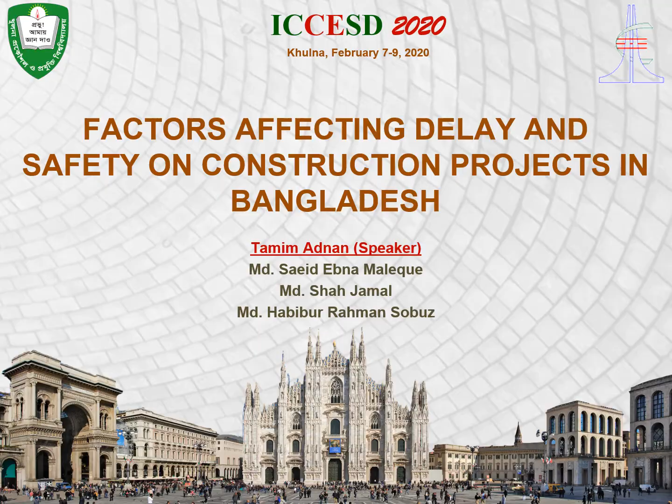The motivation of our work is that Bangladesh is tackling its large population by developing business and other activities to create employment, and to meet this demand we need lots of infrastructure and improvements. However, those improvements have been hampered because we overlook several factors. That's why projects become delayed, and we also sometimes ignore safety factors, which cause countless accidents and loss of lives in construction sites.

However, if we closely look, several countries, namely Saudi Arabia, United States, India, are now overcoming this by analyzing several factors before construction begins. They find out factors related to the project, take measures, and mitigate problems, so they can accomplish the project within schedule. That's why I think such measures should be implemented in Bangladesh as well.

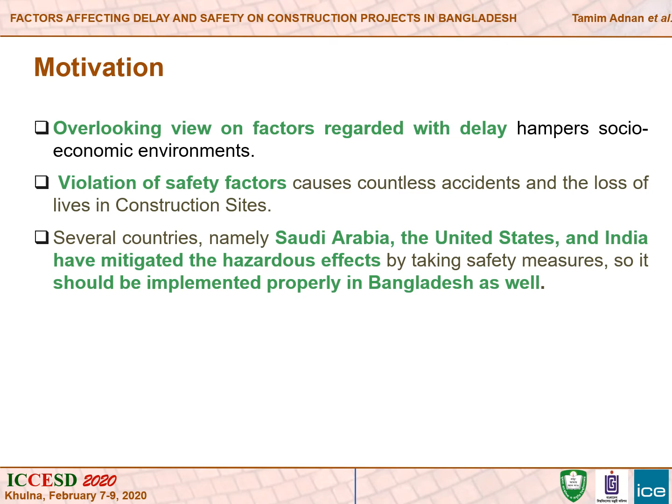If we closely look at the background of our study, we find it was first conducted by Davis and Tomasin in 1990. They discussed two types of factors: those regarding managerial activities, and another sort related to socio-cultural, economic, technological, and political environments.

In 2006, another study was done by Faridi and El-Sayegh. They found that 50% of construction projects in the United Arab Emirates were delayed because of approval of drawings, inadequate early planning, and slowness of the owner's decision, which were the main causes of delay.

In another research in 2013, Guha and Biswas found that delay factors were analyzed using a 5-point rating system, and we got motivated to start our project using two sorts of rating systems.

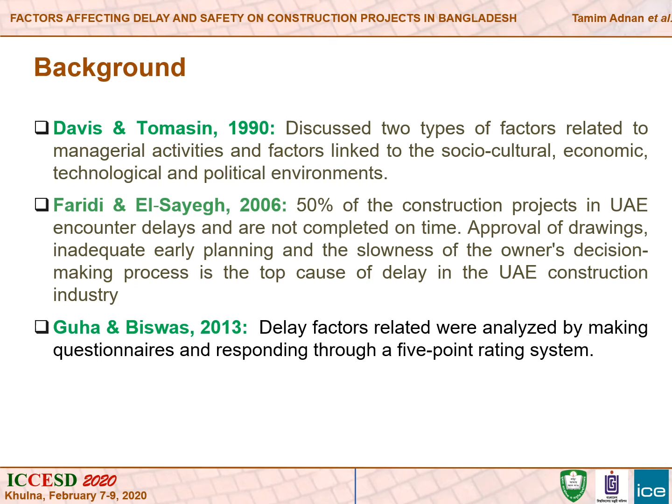Firstly, we went through several international articles, namely journals, conference papers, and reports, reviewed them to prepare a questionnaire survey, and then took interviews. We used a 5-point rating system, where 5 denotes strongly agree, and 4, 3, 2, 1 gradually show the mark of agreement. Another rating system used important to very important, and not important to less important, marked 4, 3, 2, or 1, to get the consciousness on personal protective equipment (PPE).

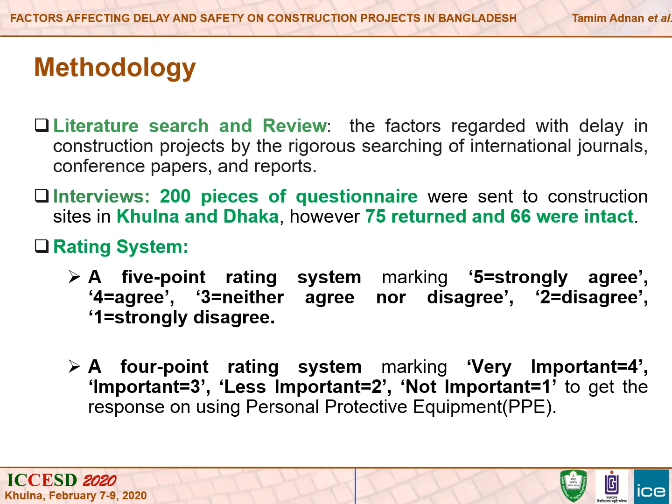Here is the flow chart showing our total methodology, from rigorous research of international articles to preparing the questionnaire survey.

We sent the survey to 200 companies where projects were running in Khulna, with Dhaka being the prevalent place. We got 75 responses, and 66 were accurate and intact. The responses are divided into two groups.

We found that the architect, owner, and engineer are actually responsible for deciding about the project, how it will run, how money will be spent, and other reasonable matters. The other group relies on the earlier group: the contractors and workers, who are responsible for executing the plan.

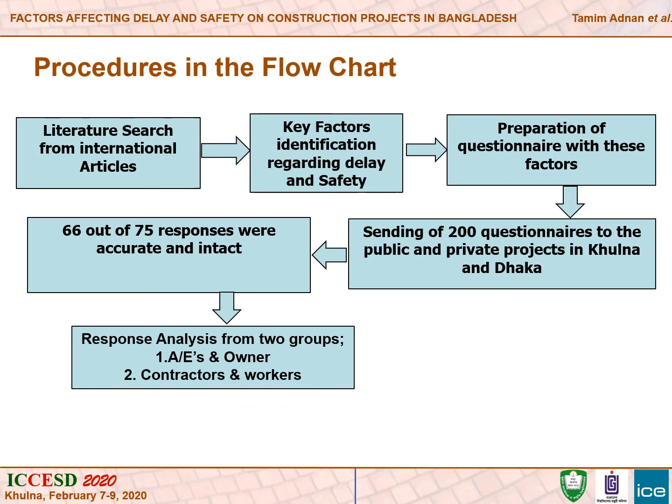By this way, we divided the responses into two sections, and the factors are categorized into 10 subcategories. The responses of people on each factor and sub-factor were taken on their average rate.

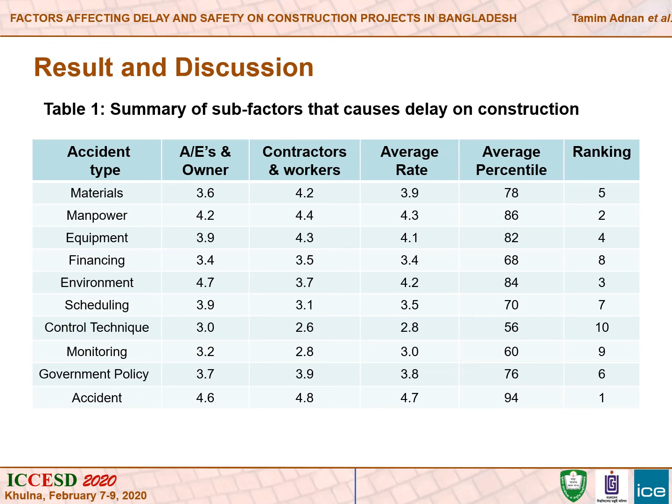Here is the type of accident or reason which makes a project delayed. The average responses on the subcategories are put in a table for both groups, and the average rate and average percentile are calculated to show the statistics. According to their average calculation, the ranking of the subcategories is found.

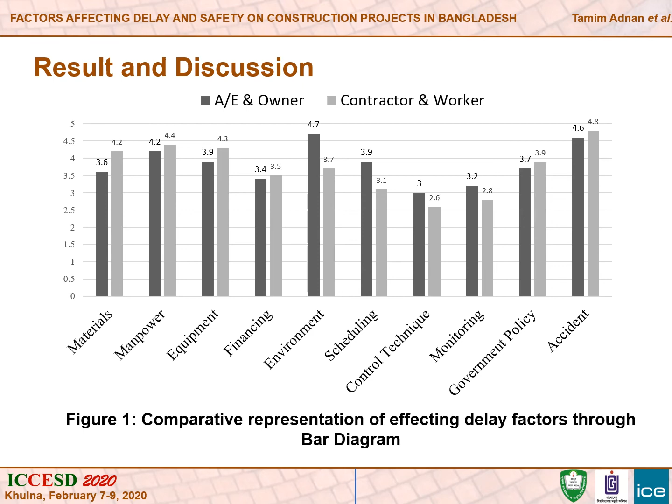We also compared the subcategories by showing a bar chart with responses from architects, owners and engineers, and contractors and workers. The values show a little variation for each group, but the fluctuation mark was noticeable in the result.

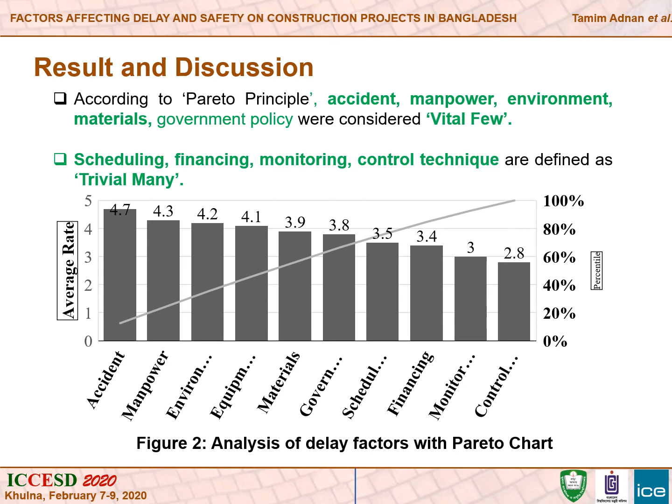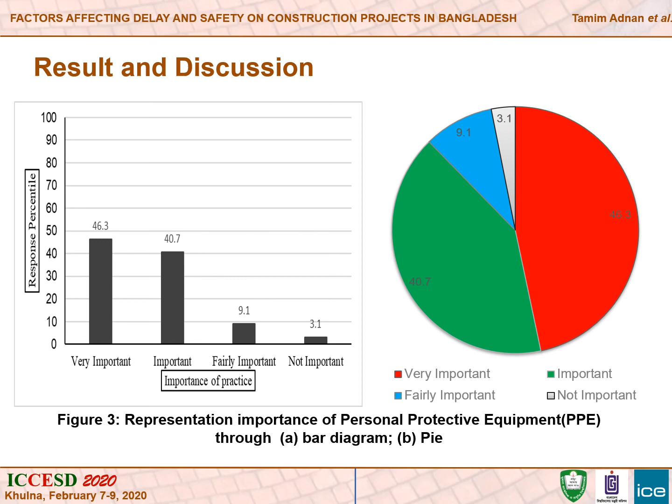The response on use of personal protective equipment was shown in a bar chart and pie chart, showing very important to not important marking system values, displayed accurately using these diagrams.

If we conclude about the result, we found that 9 out of 10 factors are above average rate. Accident, manpower, environment, and equipment are the main factors causing project delay. Also, 85% and above showed a positive review for using personal protective equipment, but we also found that numerous people are not conscious about using such materials because they have insufficient technical background and practice.

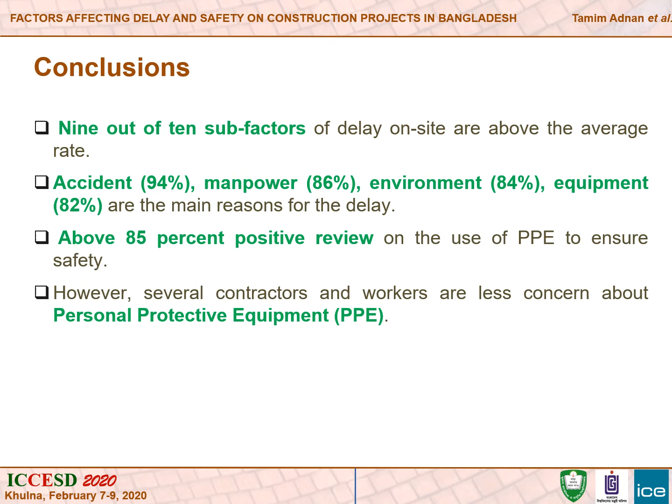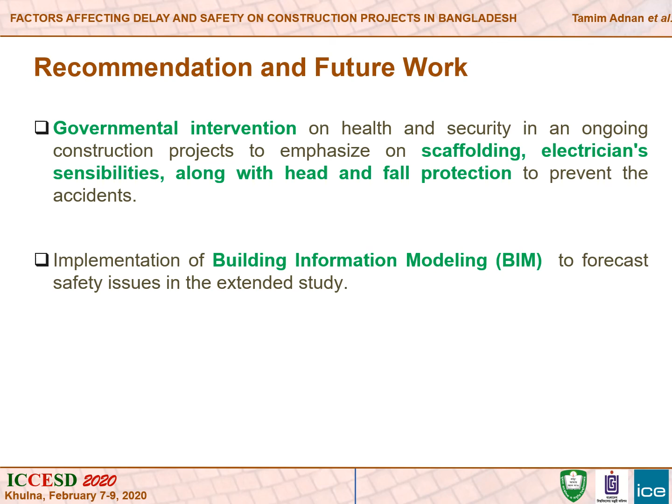That's why I strongly recommend governmental intervention to create campaigns and training to enhance the skill of laborers based on scaffolding, electrician sensibilities, along with head and fall protection to prevent accidents. Also, implementation of building information modeling can be used in the future to predict factors regarding delay and safety, which will get results more smoothly.